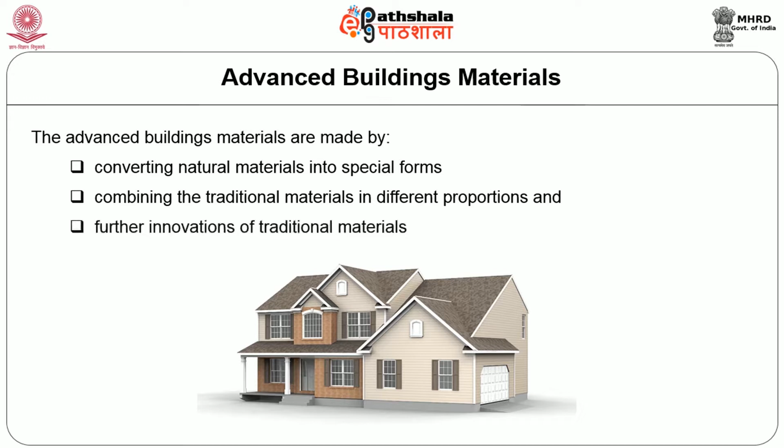First, we are going to discuss wood-based materials. In addition to wood, bamboo and plywood, many wood-based materials are nowadays manufactured in a factory to meet the current needs of the building industry. They are fiber boards, which are rigid boards available in standard sizes and thickness. It is used for wall paneling, suspended ceiling and partitions.

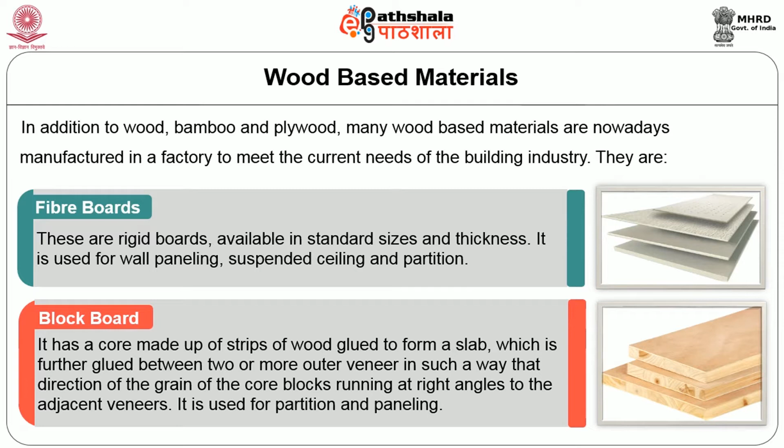The next one is block board, which has a core made up of strips of wood glued to form a slab, which is further glued between two or more outer veneers in such a way that the direction of the grain of the core blocks runs at right angles to adjacent veneers. It is used for partitions and panelings.

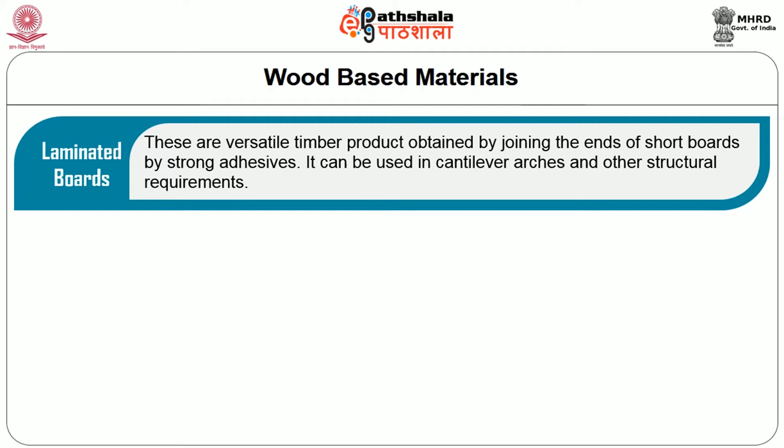The next wood-based material is laminated board, a versatile timber product obtained by joining the ends of short boards using strong adhesives. It can be used in cantilever arches and other structural requirements. Cross-laminated timber is another material, and it is the most advanced one. Compared with steel and concrete, it is cheaper, easier to assemble and more fire resistant.

Straw bale is used to create walls of a home inside of a framed structure, replacing other building materials such as concrete, wood, gypsum, plaster, fiberglass or stone. Straw bales naturally provide a very high level of insulation for hot or cold climates.

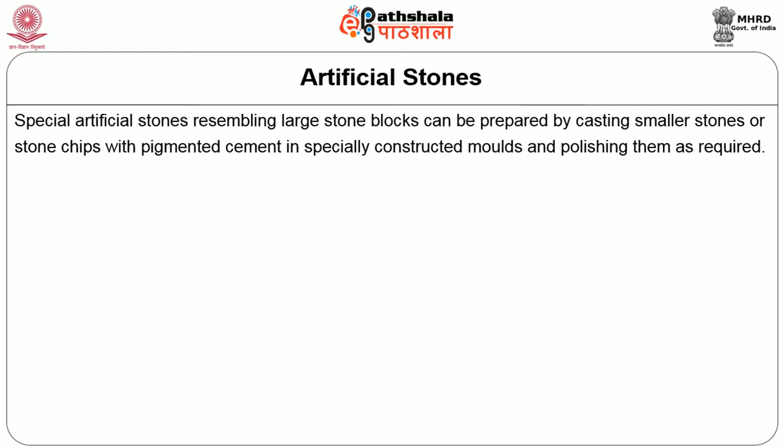The next important materials are artificial stones. Special artificial stones resembling large stone blocks can be prepared by casting smaller stones or stone chips with pigmented cement in specially constructed molds and polishing them as required. The advantages of these artificial stones are that they can be cast in different shapes and sizes as per architectural requirements.

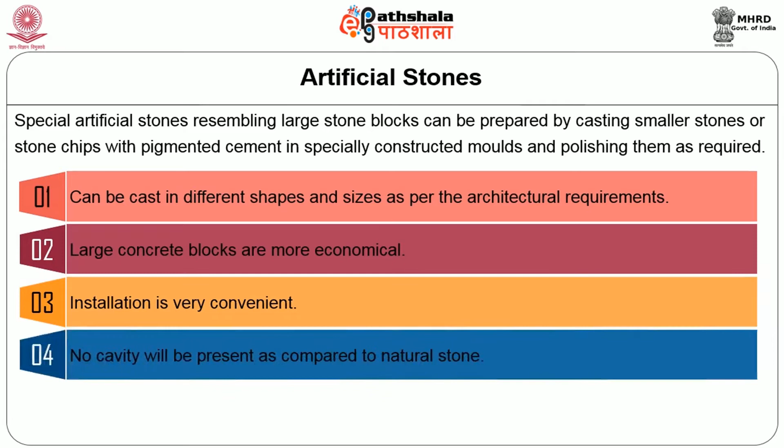These are large concrete blocks which are more economical. The installation is very convenient, and there is no cavity in it when compared to natural stone. Grooves can be kept in artificial stone while it is being cast, and these grooves can be useful for fixing various fittings.

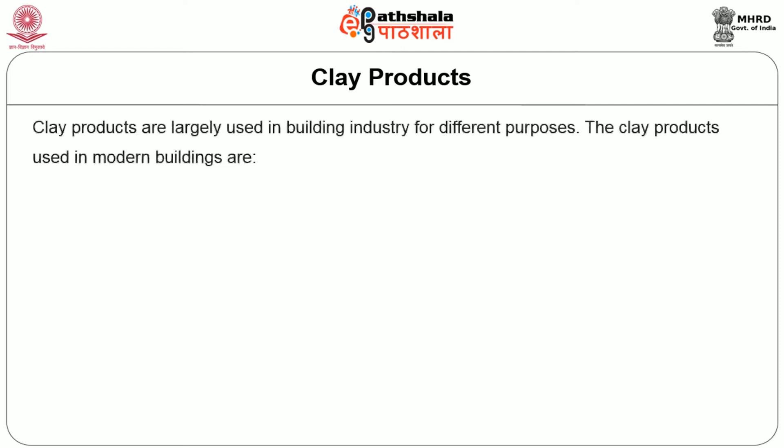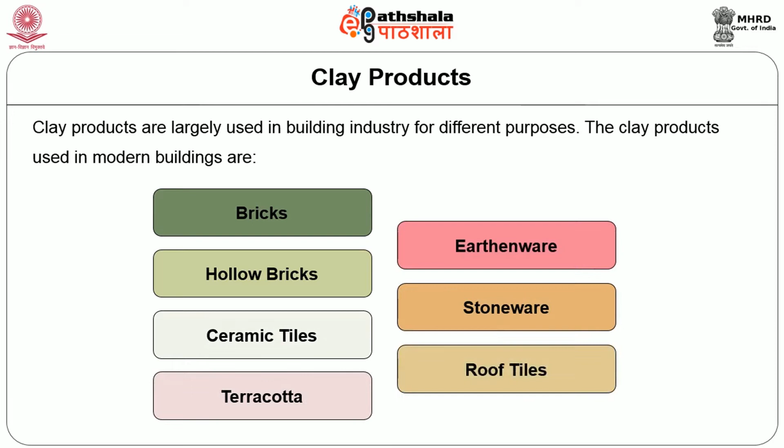The next important products are clay products. These are largely used in the building industry for different purposes. The clay products used in modern buildings are bricks, hollow bricks, ceramic tiles, terracotta, earthenware, stoneware, and roof tiles. Ceramic tiles are divided into two classes. The common tiles are used for roofing, flooring, paving, drains, walls, etc. The other one is encaustic tile, which is used for decorative purposes in floors and walls.

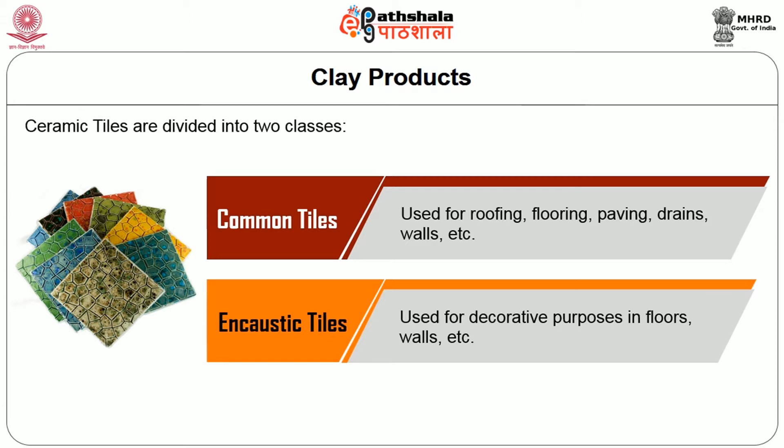The next important material is refractories, or special bricks. The term refractories denotes all materials used for construction for heat resistant purposes. The properties of refractories are: they possess excellent heat resistance, they have excellent dimensional stability, they are able to withstand abrasion, they have a high melting point, and they are chemically inert at very high temperatures.

Fire bricks or refractory bricks are made from fire clay, and the process is same as that of ordinary bricks. A refractory brick can resist high temperature without softening or melting. Due to the heat resistant property, it is used for linings of interior surfaces of furnaces, chimneys, ovens and fireplaces.

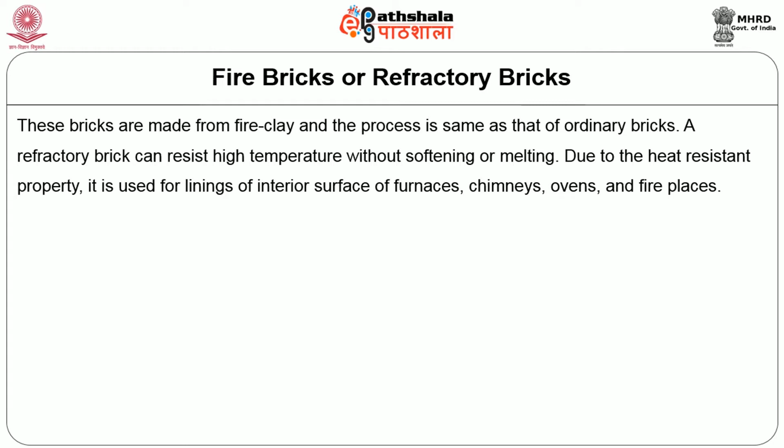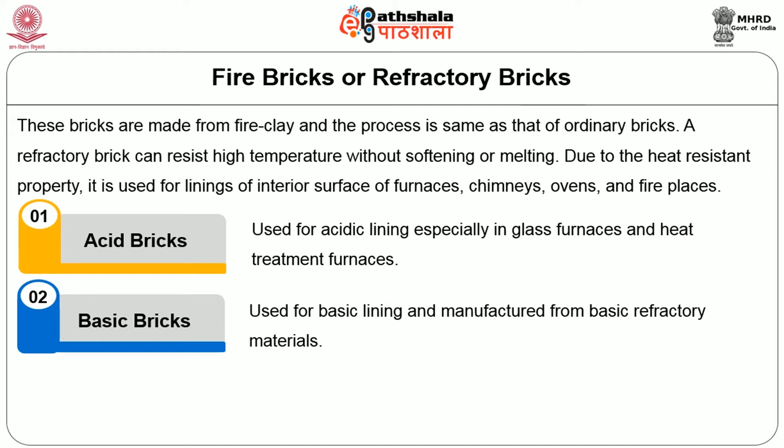There are three different types of fire bricks available. The first one are acid bricks, which are used for acidic lining, especially in glass furnaces and heat treatment furnaces. The other one is basic brick, used for basic lining and manufactured from basic refractory materials. The third one is the neutral bricks, which are used for neutral lining. They resist the corrosive action of slags and acid fumes.

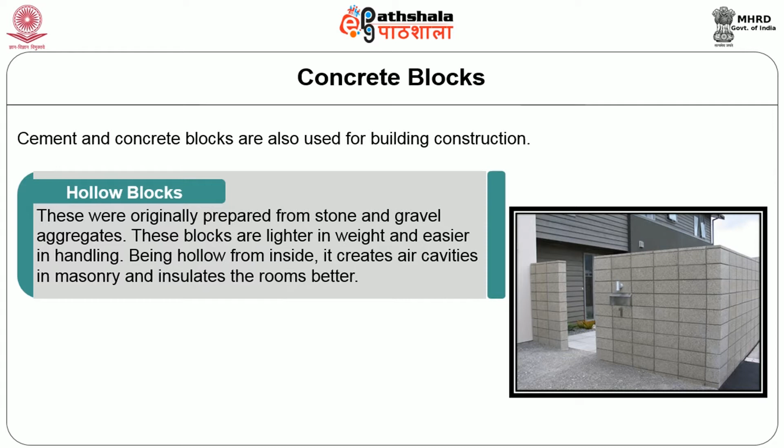The next important materials are concrete blocks. Cement and concrete blocks are also used for building construction. Hollow blocks were originally prepared from stone and gravel aggregates. These blocks are lighter in weight and easier in handling. Being hollow from inside, it creates air cavities in masonry and insulates the room better. Lightweight concrete block is manufactured by using lightweight aggregates and has good sound and thermal insulation properties.

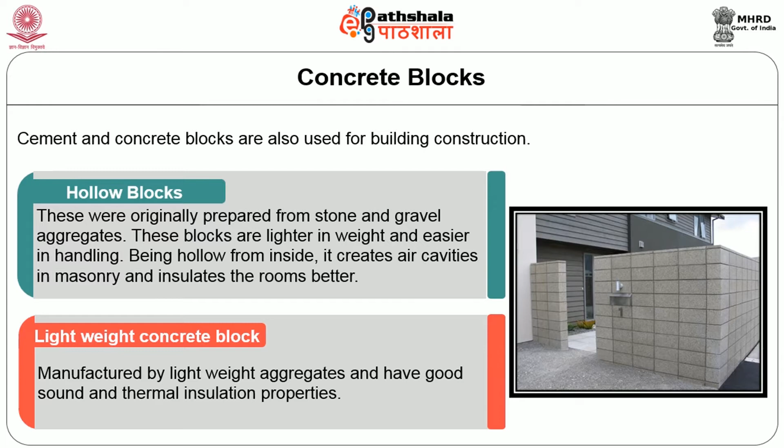Fly ash bricks is another important material which are manufactured by mixing fly ash, sand and lime in desired proportion. The manufacture of fly ash bricks will reduce environmental waste through the consumption of fly ash. It saves fuel and electricity consumption and can meet the requirement of the construction industry.

Fly ash, lime, gypsum bricks are building materials mixed with lime and gypsum. This has better bonding with mortar and brick and also provides good resistance to weathering.

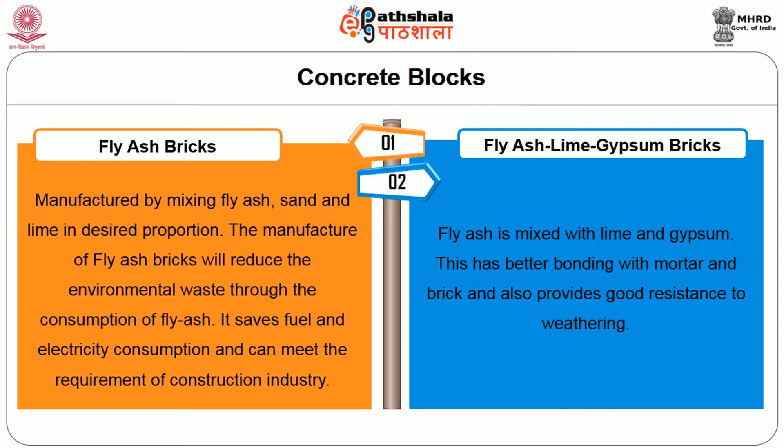Next we will see about cement and allied products. Cement is the building material obtained by burning and crushing of clay stones containing calcium carbonate and magnesium carbonate. Cement is used for various purposes and in various places like underwater, land, coastal areas, etc. Hence, it is necessary to use a particular type of cement for a special purpose.

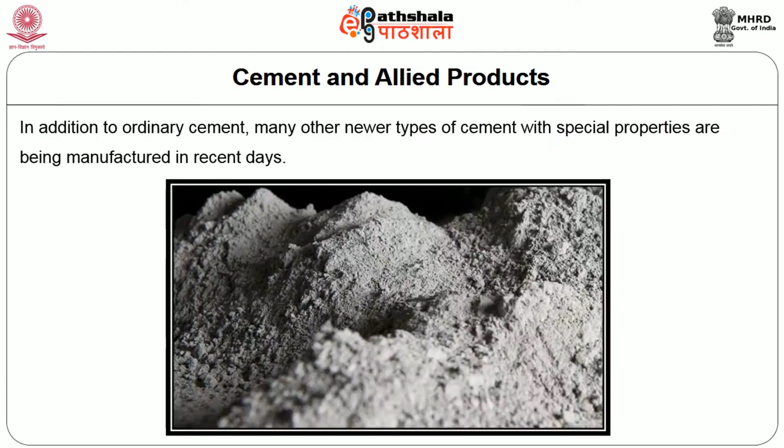In addition to ordinary cement, many other newer types of cement with special properties are being manufactured in recent days. We are going to discuss about them. First, the acid resistant cement, which increases the resistance of cement to acid and water.

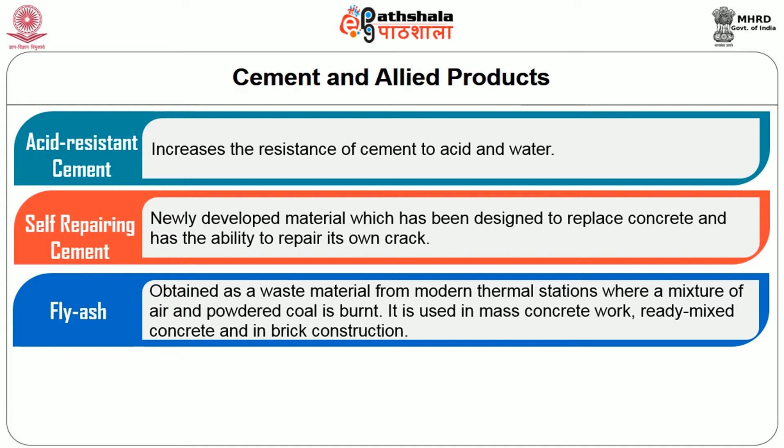Self-repairing cement is a newly developed material which has been designed to replace concrete and has the ability to repair its own crack. Fly ash is obtained as a waste material from modern thermal stations where a mixture of air and powdered coal is burnt. It is used in mass concrete work, ready-mixed concrete and in brick construction.

Liquid granite is made of recycled materials which completely replaces cement in concrete. The material is light in weight and has the same load bearing capacity of cement. Liquid granite is fire resistant and can withstand high temperatures of up to 1100 degrees Celsius for longer periods.

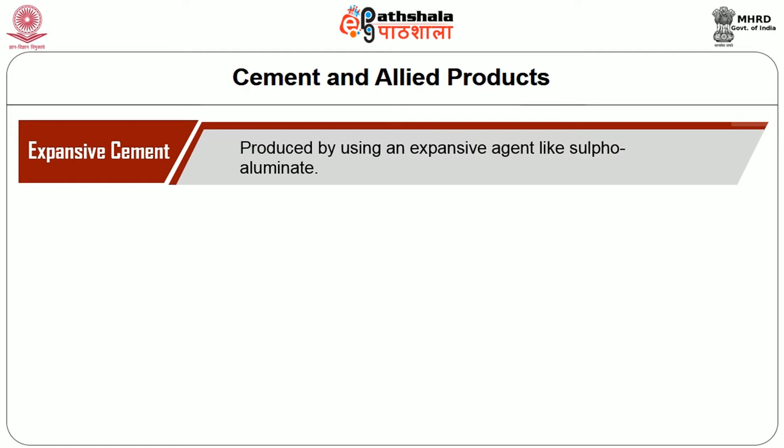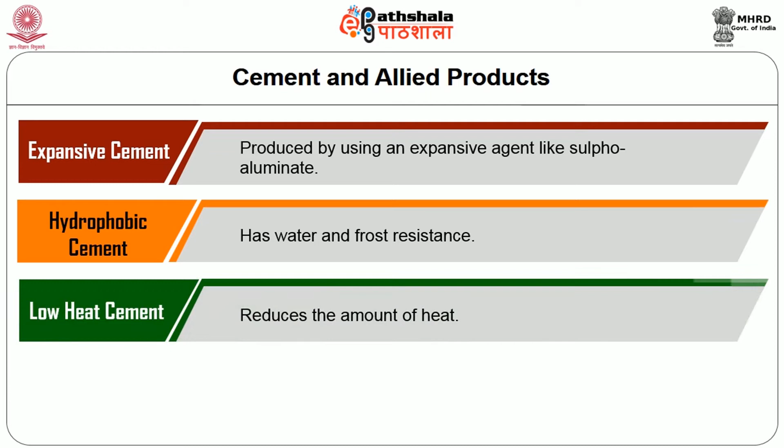Expansive cement is another type which is produced by using an expansive agent like sulpho-aluminate. Hydrophobic cement is a newer material which has water and frost resistant property. Low heat cement reduces the amount of heat. Next type is air entraining cement, which is specially suited to improve workability with smaller water cement ratio and to improve frost resistance of concrete.

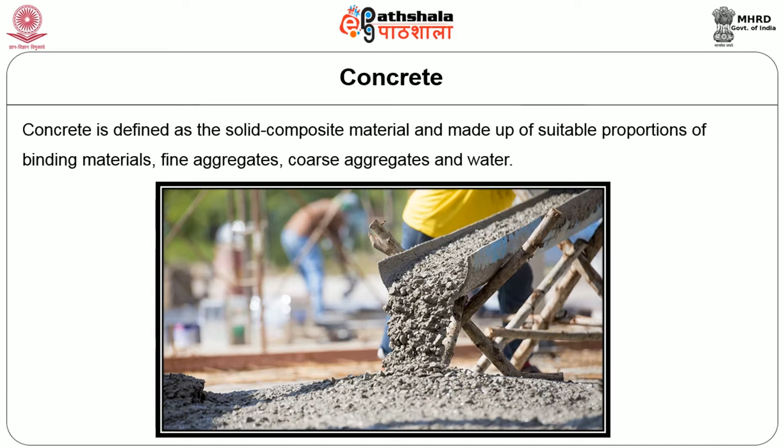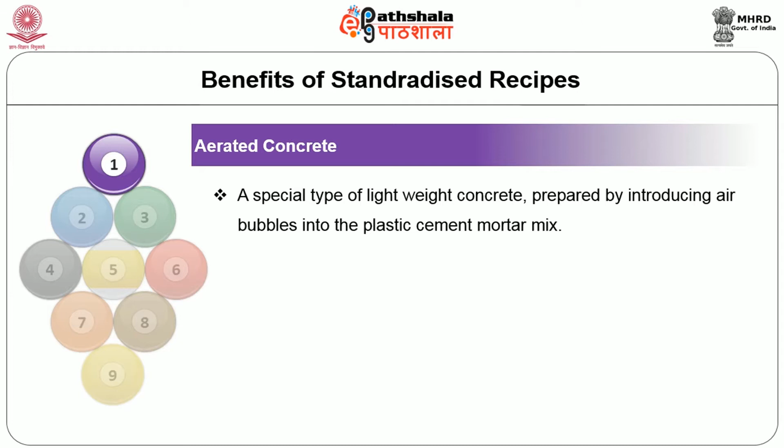Next, we are going to elaborate on concrete. Concrete is defined as the solid composite material made up of suitable proportions of binding materials, fine aggregates, coarse aggregates and water. The special types of concrete which have been recently developed are aerated concrete, which is a special type of lightweight concrete prepared by introducing air bubbles into the plastic cement mortar mix.

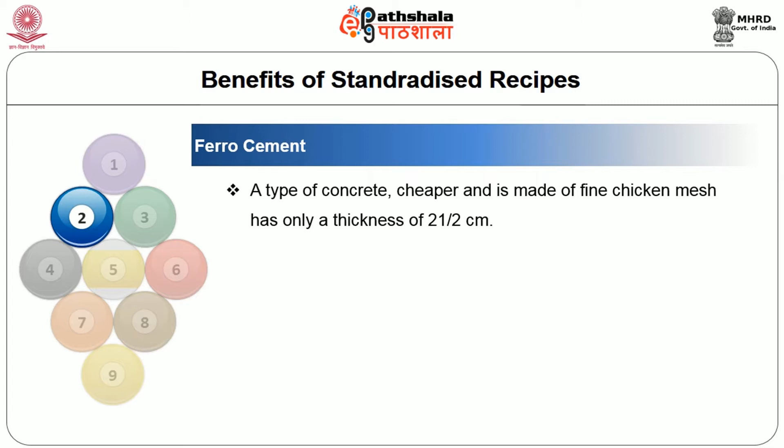Ferro cement is a type of concrete which is cheaper and is made of fine chicken mesh, has only a thickness of 2.5 cm. Translucent concrete is a concrete based building material mixed with glass fiber optical strands which create a solid but sheer block. It can be used in flooring and pavements. The light transmitting property gives a fresh, open and spatial look to the interiors.

Next advanced concrete is insulated concrete panels, which are the most durable, strong and energy efficient new home building materials available in the market. These panels are constructed with 4 to 6 inches of polystyrene or polyurethane insulation and concrete on both sides.

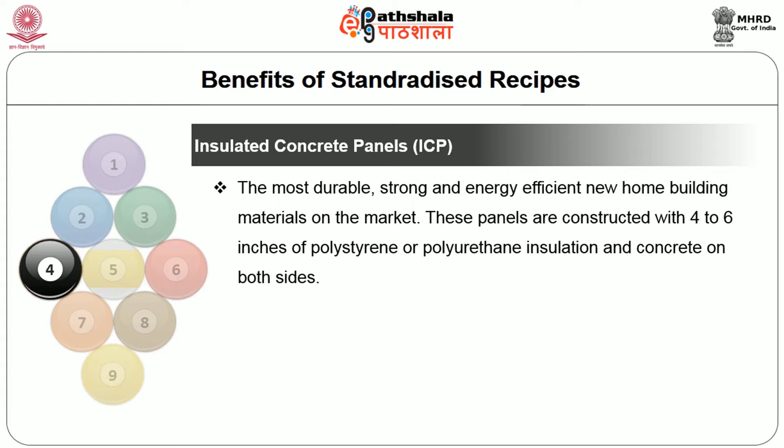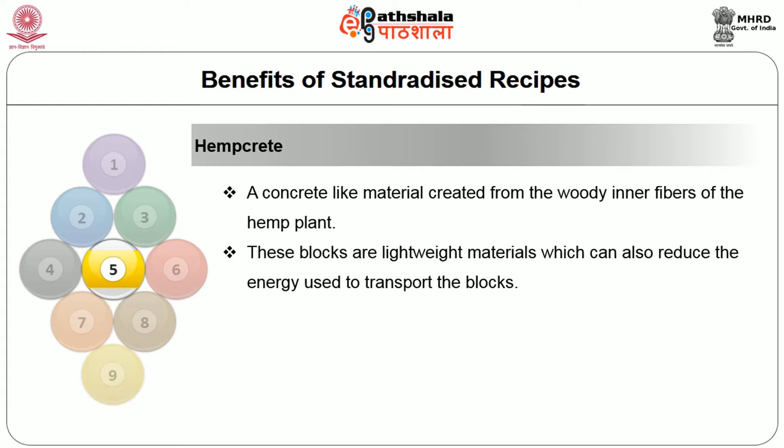Hempcrete is a concrete-like material created from the woody inner fibers of the hemp plant. These blocks are lightweight materials which can also reduce the energy used to transport the blocks.

Richlite is another new material which is a dense material made from paper and phenolic resin. The main constituent of the material is recycled paper. It has very high strength and is highly resistant to temperature up to 350 degrees Fahrenheit.

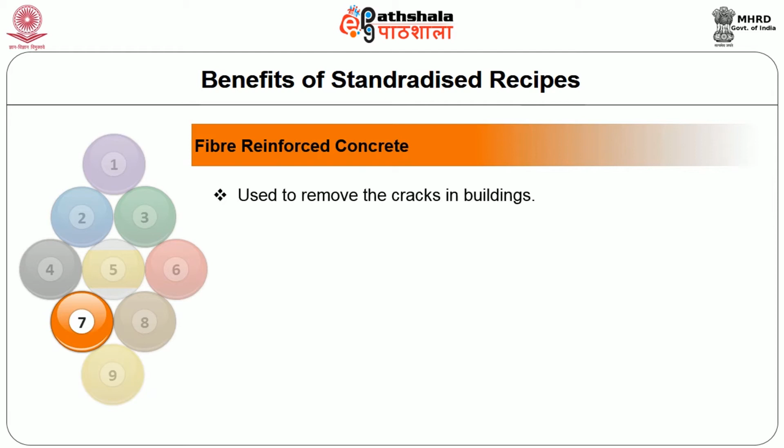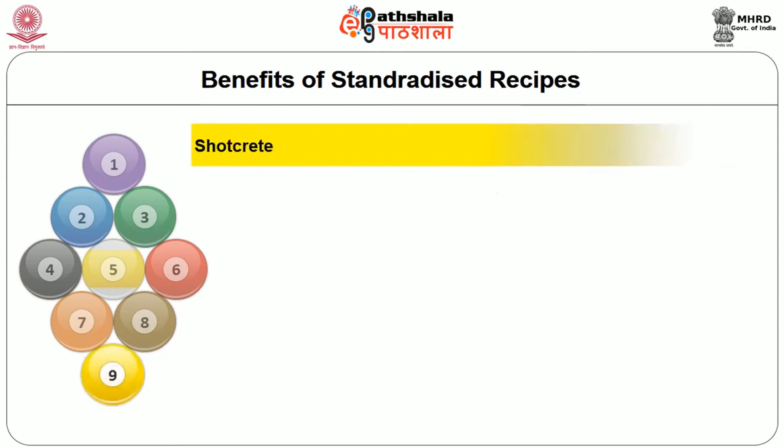Fiber reinforced concrete is used to remove cracks in buildings. Polymer concrete has high corrosion resistance, low permeability and high resistance to vibration. Shotcrete is an advanced technique in which concrete is applied over a surface pneumatically at high velocity. Other advanced concrete types are prepacked concrete, vacuum concrete and pumped concrete.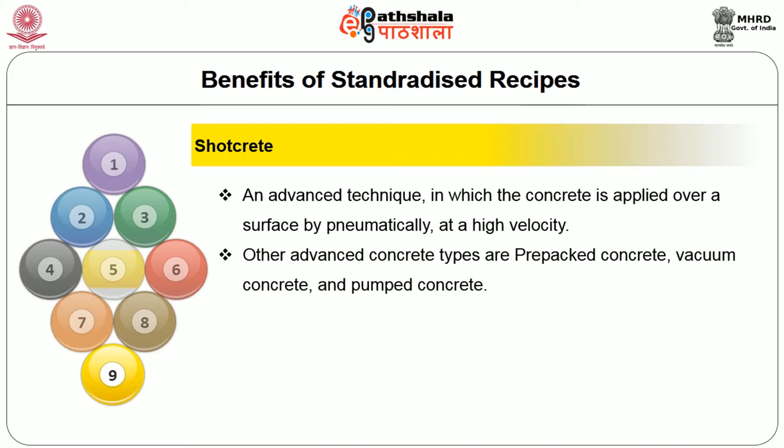Next, we are going to discuss the special metals used in the construction industry. First, we will see about steel. Steel is a ferrous material which is harder and tougher than iron. Nowadays, steel is subjected to various heat treatments to change its property, to increase surface hardness, to increase resistance to heat and corrosion, to make the steel easily workable, to increase strength and hardness, and to refine the grain. The next important metal used in construction is aluminium, which has many unique properties that make it an essential building material.

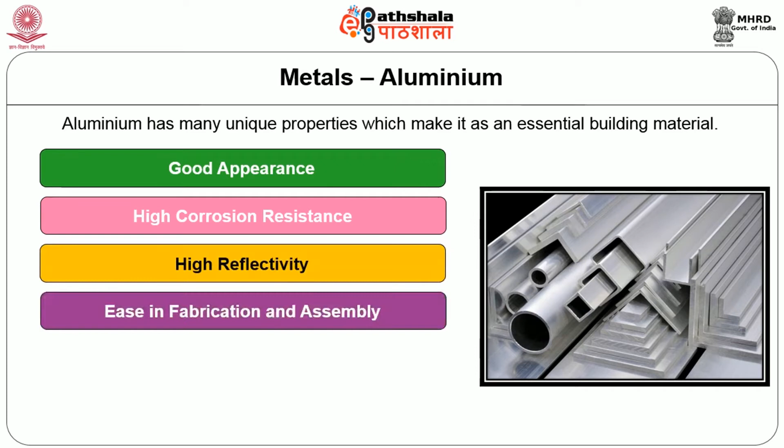These properties are good appearance, high corrosion resistance, high reflectivity, ease in fabrication and assembly, noise control and air tightness. Transparent aluminium is a crystalline material with excellent optical transparency. It is hard, highly strong and durable, and is used in the construction of windows, domes, plates, rods and tubes in a wide range of sizes and thicknesses.

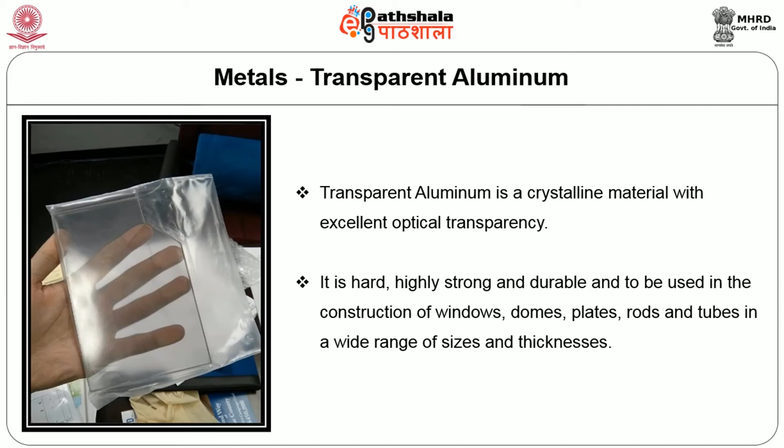The next very important and versatile material is glass. Numerous varieties of glass have been developed in recent times for various purposes such as walls and ceilings of hollow glass plaques, windows, furniture, bathroom fittings, glazing, etc. It is possible to change the chemical, electrical, mechanical and optical properties of glass by suitably changing its basic composition. Flat glass comes in many highly specialized forms intended for different applications, which are discussed now.

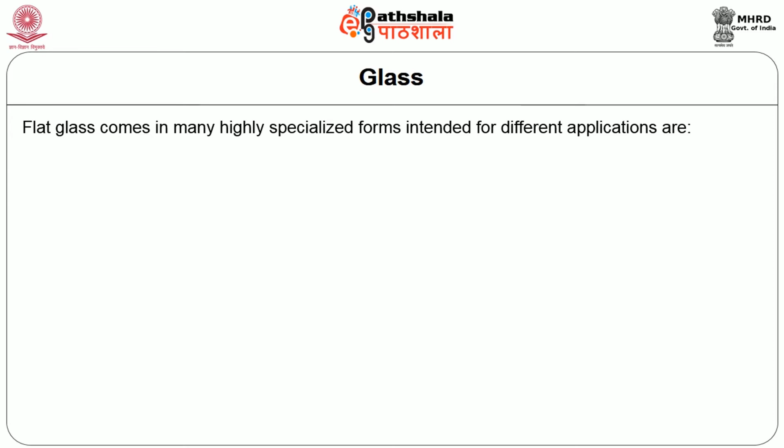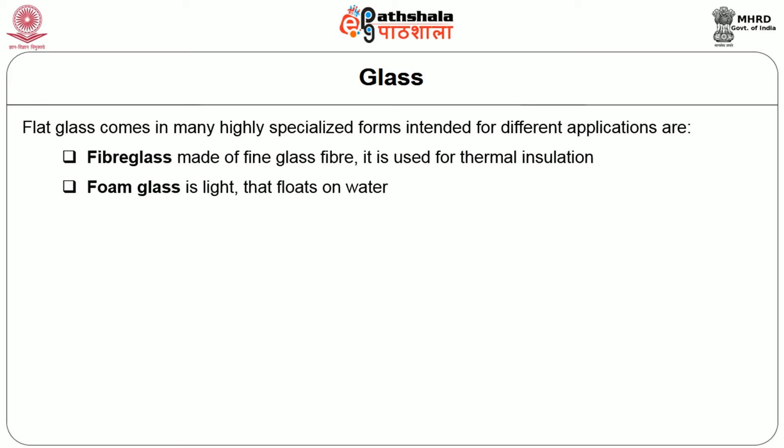Fiberglass, which is made of fine glass fiber, is used for thermal insulation. Foam glass is light and floats on water. Another type is ultraviolet ray glass, which transmits ultraviolet rays effectively. Invisible glass allows more light to pass through. Safety glass, if it breaks, the pieces will not shatter.

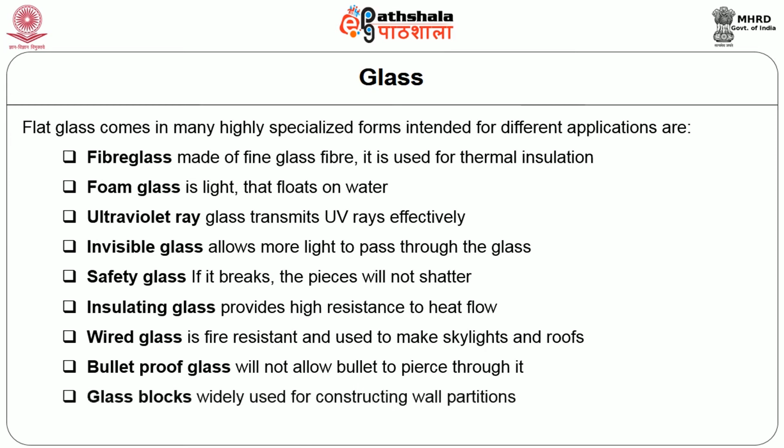Insulating glass provides high resistance to heat flow. Wired glass is fire resistant and used to make skylights and roofs. Bulletproof glass will not allow a bullet to pierce through it; it is a very strong glass. Then there are glass blocks, which are widely used for constructing wall partitions.

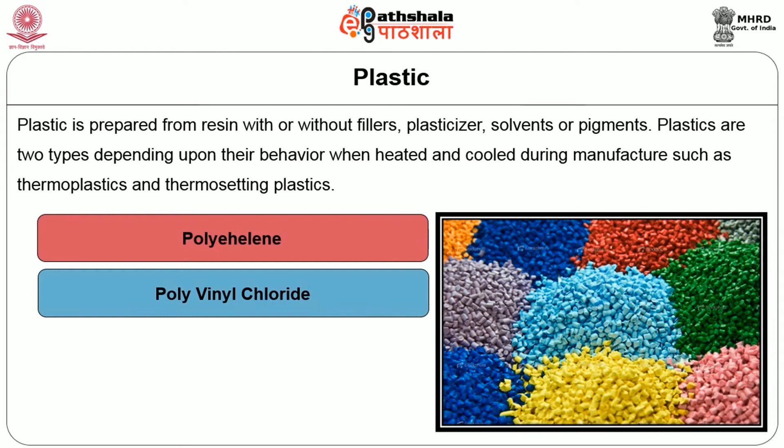The next material we are going to discuss is plastic, which is prepared from resin that may be natural or synthetic, with or without fillers, plasticizer, solvent or pigments. Plastics are of two types depending upon their behavior when heated and cooled during manufacture: thermoplastic and thermosetting plastics. Various plastic materials used recently in buildings are polyethylene, polyvinyl chloride, melamine formaldehyde and acrylic.

Gypsum is a white crystalline substance made of hydrated sulfate of calcium, also recently used as a building material. It is mainly used in the manufacture of cement to increase its setting time, in paper industries, and for preparing gypsum boards and plaster of Paris.

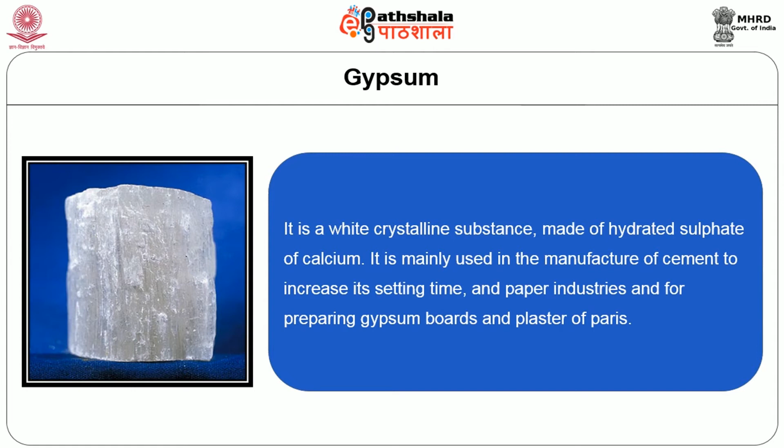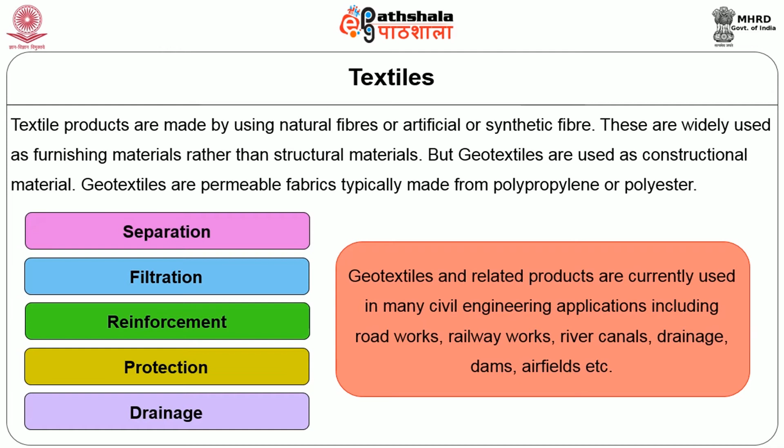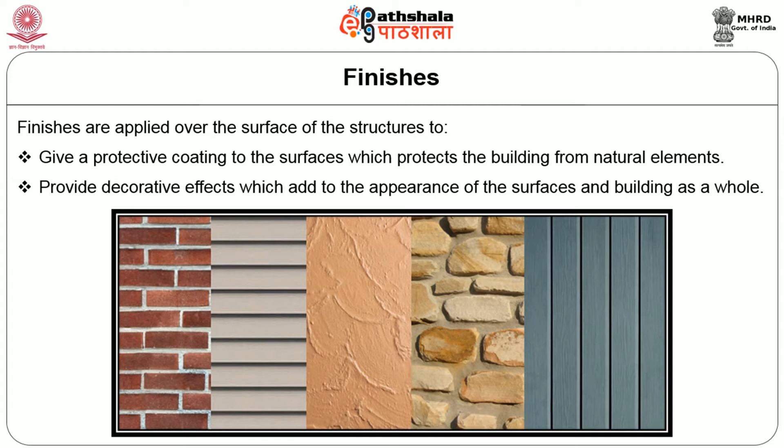Finishes are applied over the surface of structures to give a protective coating, which protects the building from natural elements such as rain, wind and sun, and which provides decorative effects that add to the appearance of the surfaces and the building as a whole.

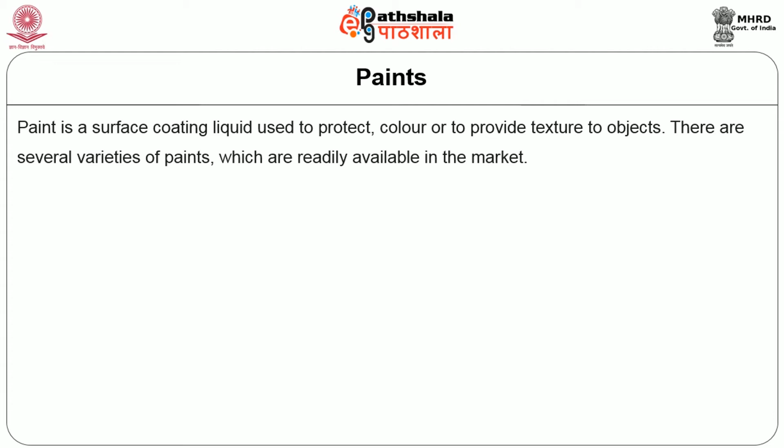Wall finish: though many wall finishes are available for current use, a few will be described here. Paint is a surface coating liquid used to protect, color or provide texture to objects. There are several varieties of paints readily available in the market. Chlorinated rubber paints are used for protecting surfaces against acid fumes.

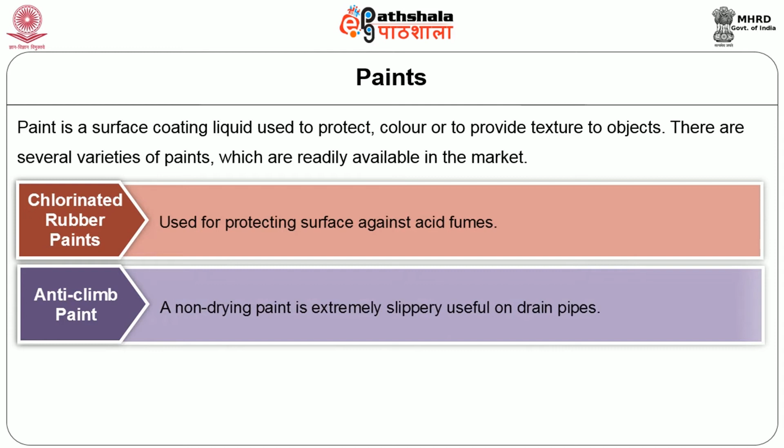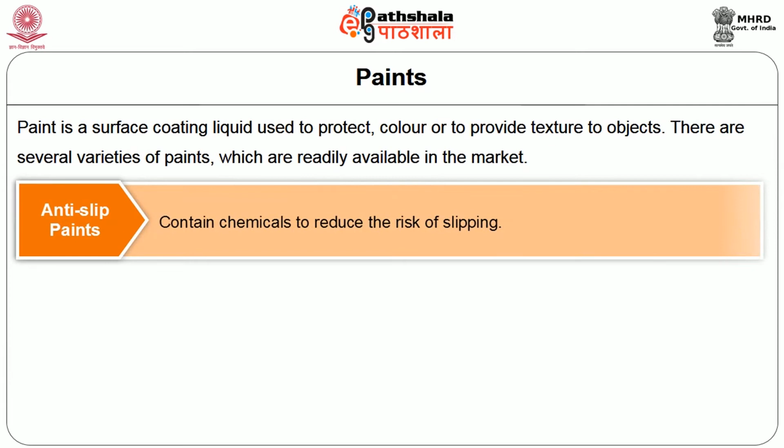Anti-climb paint is a non-drying paint used to make surfaces extremely slippery, useful on drain pipes. Anti-slip paint contains chemicals to reduce the risk of slipping. Insulating paint reduces the rate of heat transfer through the surface where it is applied.

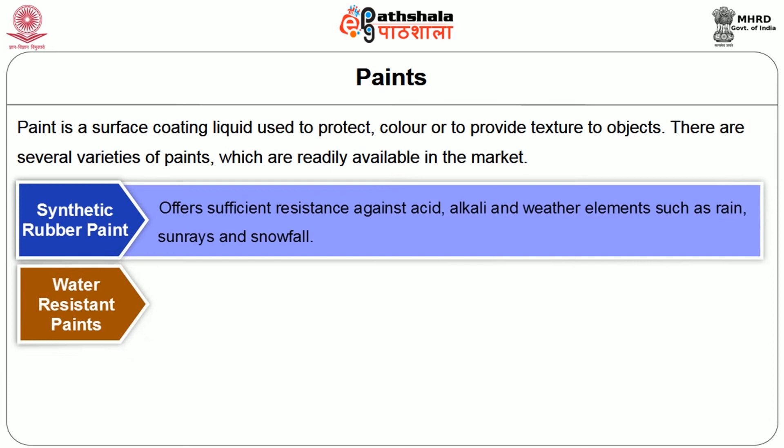Roof coating is a liquid that provides ultraviolet protection. Synthetic rubber paint or rubber-based paints offer sufficient resistance against acid, alkali, and weather elements such as rain, sun rays and snowfall. Water-resistant paints give a high glossy finish and are ideal for kitchens and bathrooms, as these areas are subject to a lot of moisture.

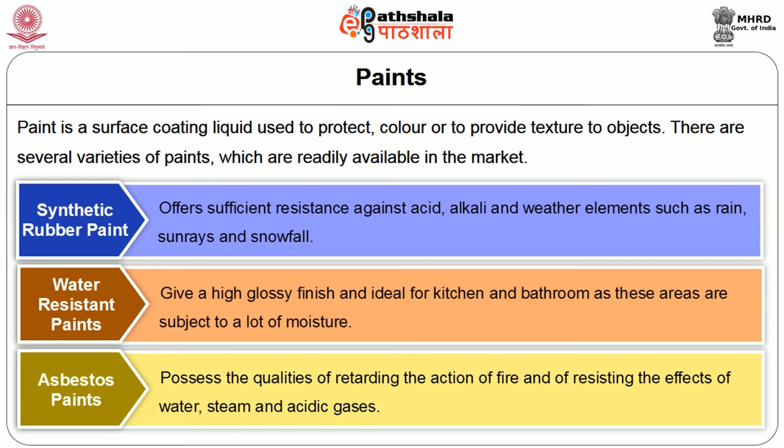The next important paint is asbestos, which possesses the qualities of retarding the action of fire and resisting the effects of water, steam and acidic gases.

When we talk about exterior paints, all paint companies in India have produced and marketed their own brand of exterior emulsion paints with special qualities such as good appearance, waterproof, antifungal, anti-algae and heatproof or reflective properties.

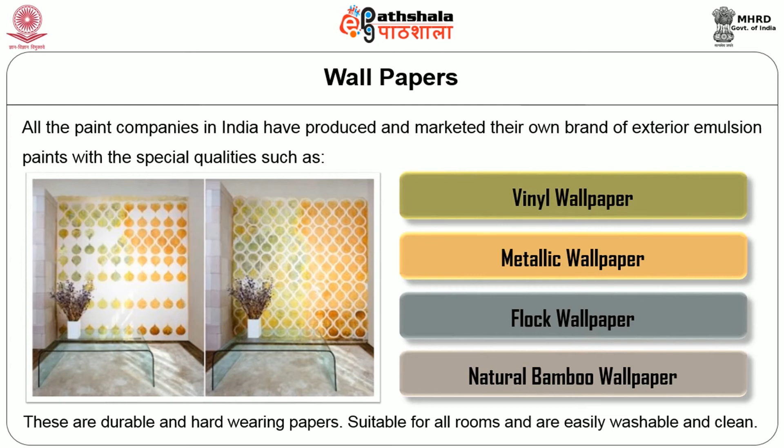Next we will pass on to wallpapers. There are many types of wallpapers available in the market today, such as vinyl wallpaper, metallic wallpaper, flock wallpaper and natural bamboo wallpaper. These wallpapers are durable and hard wearing, suitable for all rooms, and are easily washable and clean.

Next we will discuss wall panels as used as a finish. These are made of thin sheets of material installed over walls to add aesthetic and functional characteristics of a wall. Many panels made with wood, plywood, laminates, stainless steel and plastics are available in the market today.

Wall panels are made of thin sheets of material installed over walls to add aesthetic and functional characteristics. Many panels made with wood, plywood, laminates, stainless steel and plastics are available in the market.

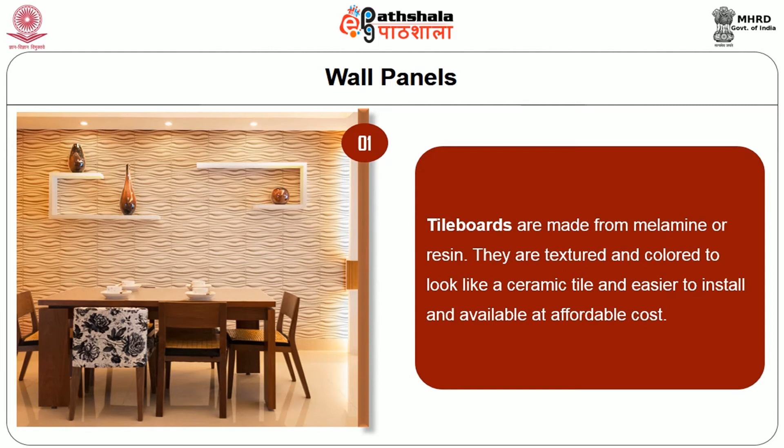The newer varieties are tile boards, which are made from melamine or resin. They are textured and colored to look like ceramic tile, easier to install and available at affordable cost.

The next important panels are acoustical panels, which are used to control noise levels in a space. They are made from foam or wood, which helps panels absorb sound, and are commonly used in schools, auditoriums and hotels.

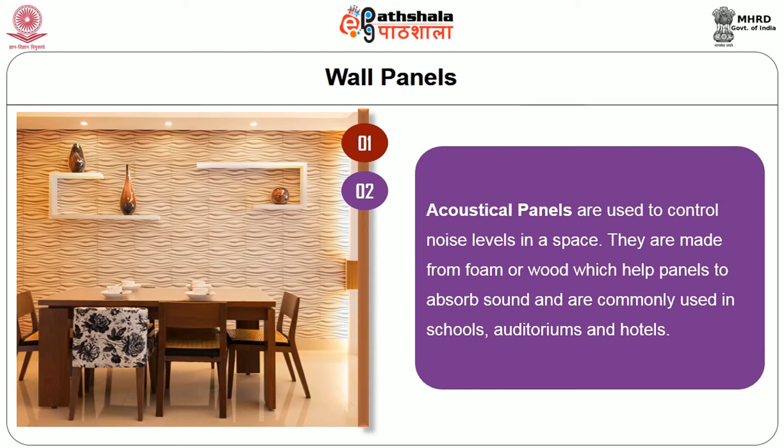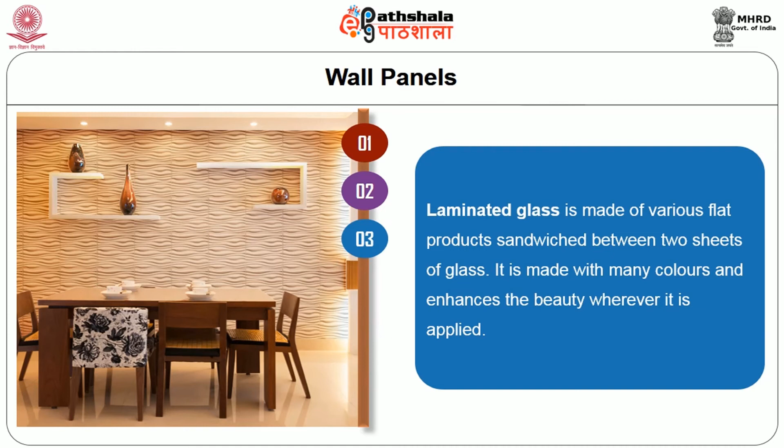Laminated glass is another type of wall finish, made of various flat products sandwiched between two sheets of glass. It is made with many colors and enhances the beauty wherever it is applied.

Etched glass is another material, obtained by treating the glass with hydrofluoric acid to produce a surface finish that has a frosted appearance. The etching on glass is used to diffuse light, reduce glare and obtain a translucent appearance.

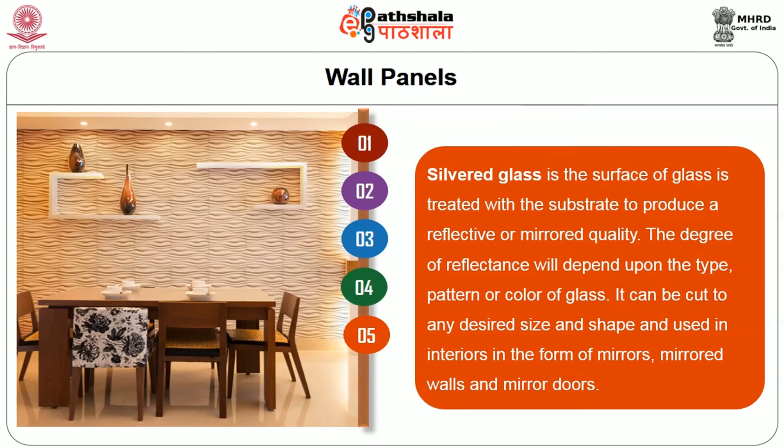Silvered glass: the surface of glass is treated with a substrate to produce a reflective or mirrored quality. The degree of reflectance depends upon the type, pattern or color of glass. It can be cut to any desired size and shape and used in interiors in the form of mirrors, mirrored walls and mirrored doors.

Plaster of Paris is another material which gives a smooth finish. It is generally applied on internal walls for ornamental works and produces a hard and strong surface.

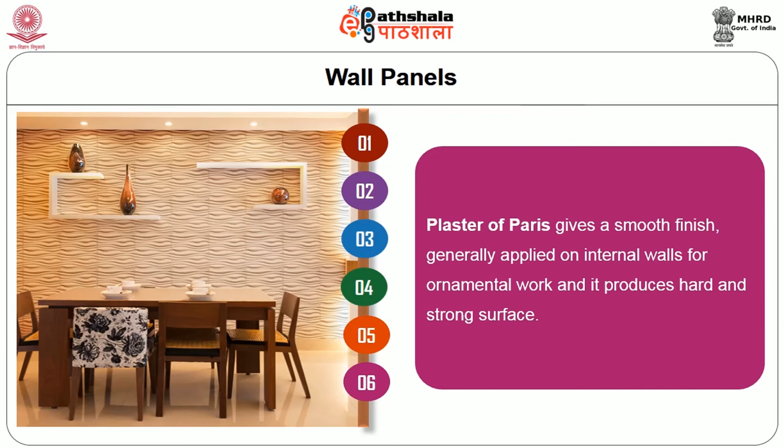We will pass on to the topic of floor finish. Floors are the horizontal elements of the building structure and provide support for the occupants. Various types of materials and finishes are employed for flooring. Floor finishes can be classified as hard floor finishes, resilient floor finishes and soft floor coverings.

Hard floor finishes: mud, stone, brick, timber, concrete, terracotta, terrazzo and ceramic tile were the floor surfaces which have been used for several years. However, there are several new materials which have come recently and are being laid on floors to improve their appearance and functionality.

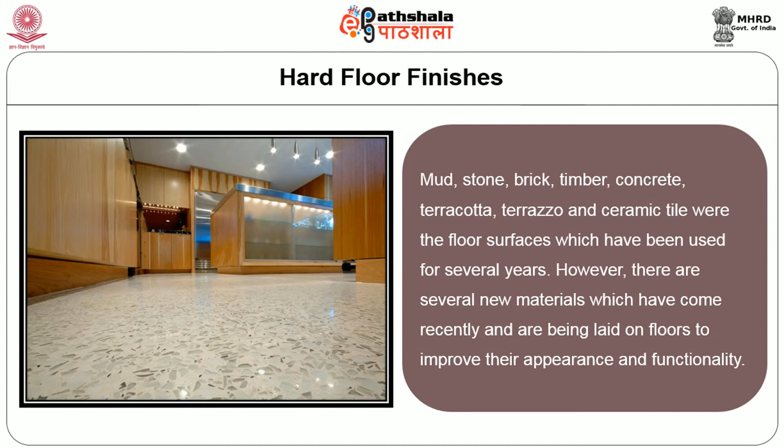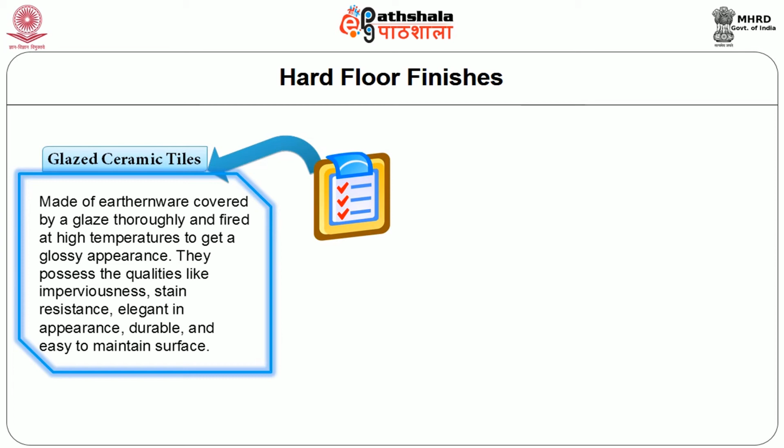One such important material is glazed ceramic tile, made of earthenware covered by a glaze and fired at very high temperature to get a glossy appearance. They possess qualities like imperviousness to water, stain resistance, elegant appearance, durability and an easy-to-maintain surface.

Terrazzo is another special type of flooring in which marble chips are embedded in a matrix of cement concrete. This terrazzo flooring is becoming very popular these days for providing floor finishes in banks, shopping malls, hotels, etc.

Glass flooring can also be used as a special floor finish where it is desired to transmit light from an upper floor to another lower floor, such as from a ground floor to a basement.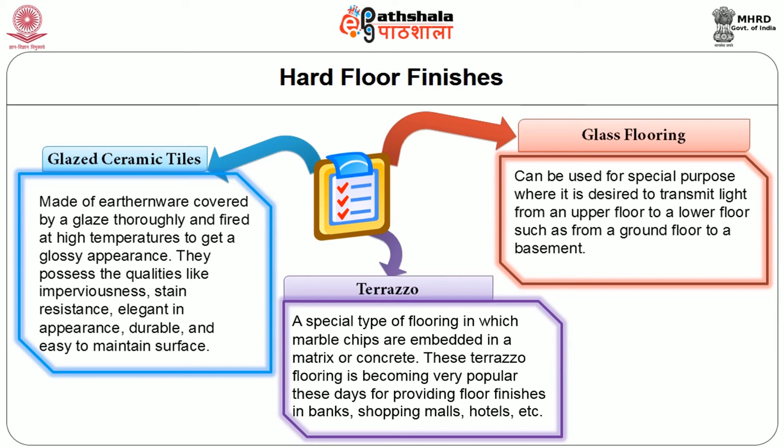We will pass on to resilient floor finishes. These finishes are soft and resilient, which means they readily recover their original shape after compression.

Resilient floors which are popular in recent days include vinyl, a synthetic mixture made from vinyl resins, colored pigments and plasticizers. It is available in sheets and tiles, both plain and patterned, with self-sticking backs that make it easy to lay. Its advantages are: it resists abrasion and dirt, is attractive, easily maintained and fire retardant.

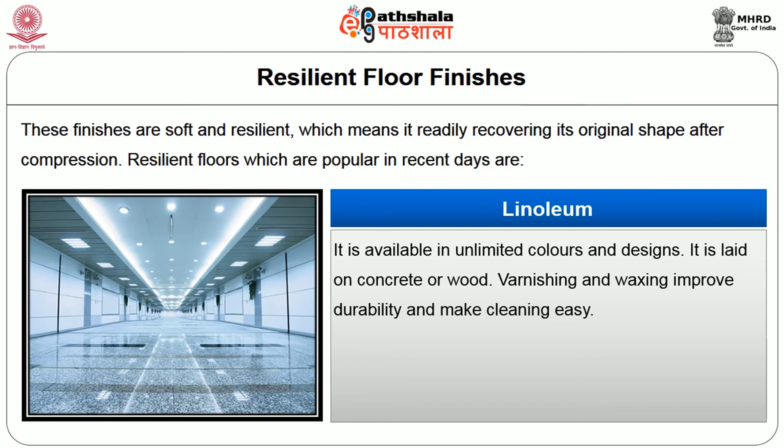Linoleum is another resilient floor finish which is available in unlimited colors and designs. It is laid on concrete or wood floors. Varnishing and waxing improve the durability of linoleum floors and make them easy to clean.

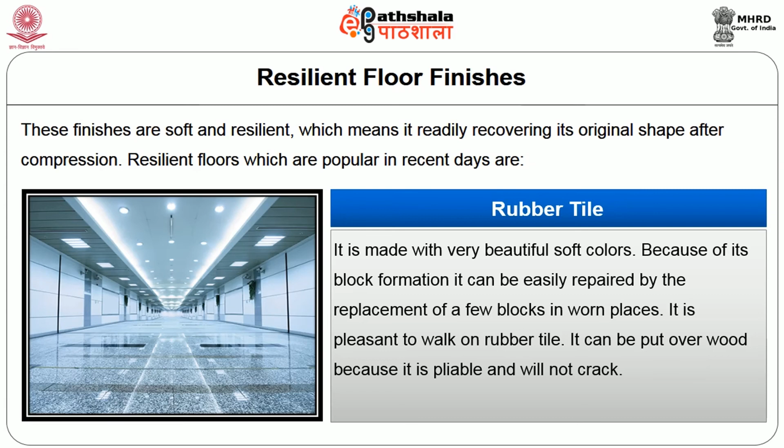Rubber tile is made with very beautiful soft colors. Because of its block formation, it can be easily repaired by the replacement of a few blocks in worn places. It is pleasant to walk on and can be put over wood because it is pliable and will not crack.

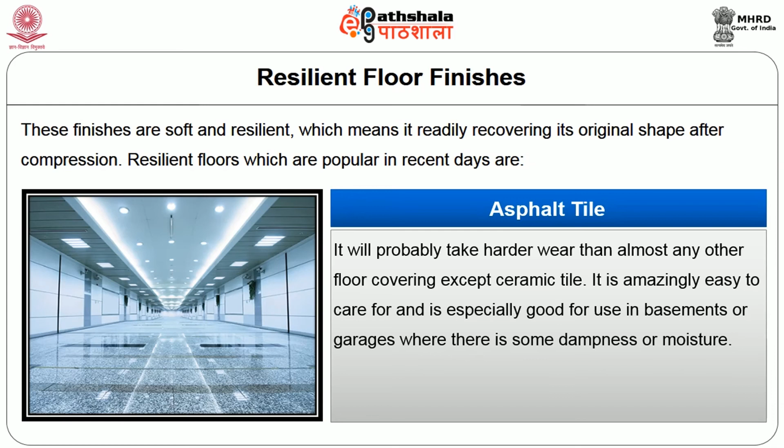Advanced flooring is plastic or PVC flooring, a recent development in floor construction, successfully used as a covering over the concrete floor base in all types of buildings. Asphalt tile will probably take harder wear than almost any other floor covering except ceramic tile. It is amazingly easy to care for and especially good for use in basements or garages where there is some dampness or moisture.

Next, we will pass on to soft floor coverings. The use of soft floor coverings such as rugs and carpets, mostly woven using natural or synthetic fibers, has increased in the past few years.

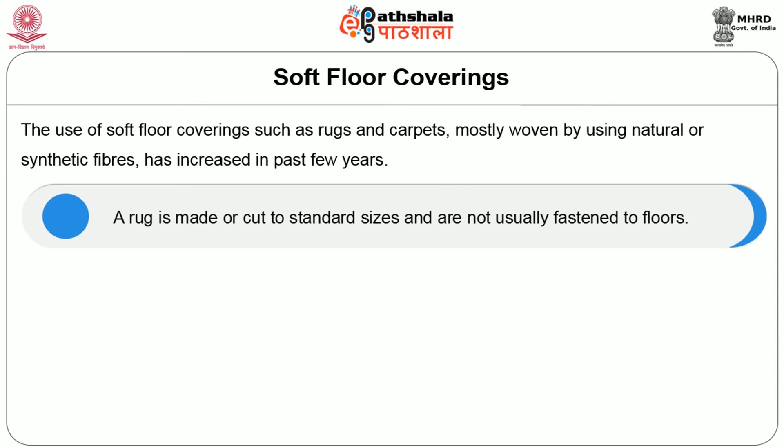A rug is made or cut to standard sizes and is not usually fastened to floors. Carpet is a type of rug cut and pieced to cover the entire floor and is generally fastened to the floor.

The style and performance of carpet have seen many advances in recent years. With the use of technology and development of new fibers, today's carpet manufacturers are able to combine texture, color and pattern to create beautiful carpets.

Polyester and nylon carpets are the first choice of consumers today because of their durability, high resiliency, soil and stain resistance, softness, resistance to fading, and resistance to mildew and moths. These carpets are a good choice for high traffic areas or rooms where children or pets play.

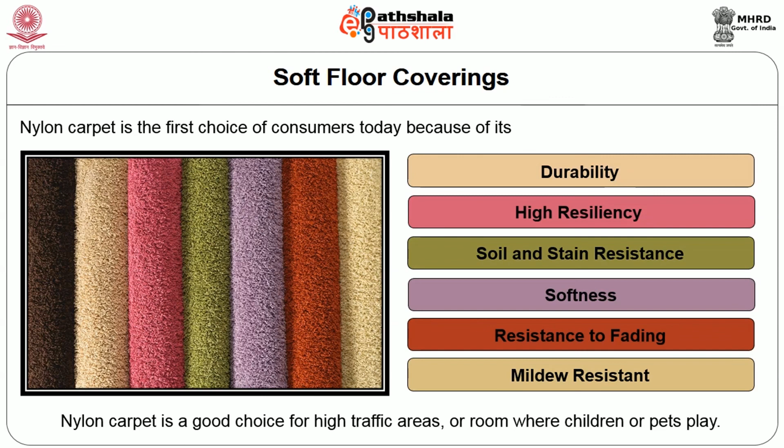Next, we will pass on to the topic of ceiling finishes. Plaster finish has evolved over the centuries. Now, various techniques are employed to make this oldest form of finish more interesting.

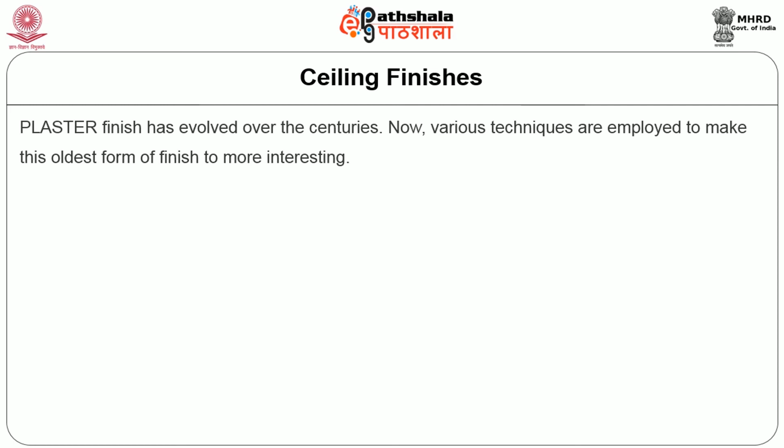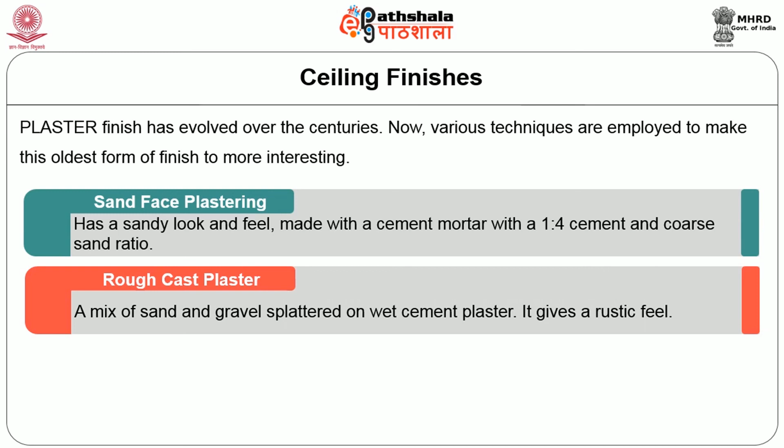Sand face plastering has a sandy look and feel, made with a cement mortar in a 1:4 cement and coarse sand ratio. Rough cast plaster is a mix of sand and gravel splattered on wet cement plaster, giving a rustic feel.

Another finish, pebble dash plaster, is the same as rough cast plaster, but 6 mm pebbles are used in the mix. Another important ceiling finish is drywall, a method of construction using gypsum board.

These panels are usually fastened directly to the ceiling joists, and the joints are made invisible by taping. There are different types of drywall materials available, such as fire resistant boards, acoustical boards, mold resistant boards, and foil backed drywall.

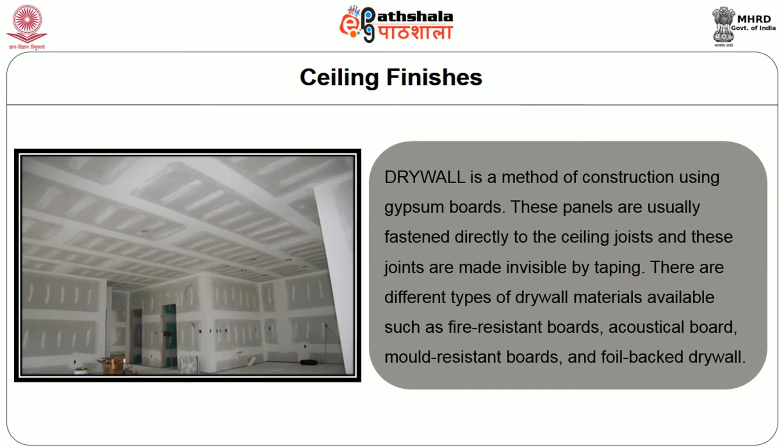False ceiling, also known as dropped ceiling or suspended ceiling, is a ceiling that hangs lower from the roof, leaving space between the actual roof and ceiling.

It improves the aesthetic appearance of the interior and helps in acoustical treatment. It hides all non-pleasing elements from view. False ceilings can be made with a variety of materials.

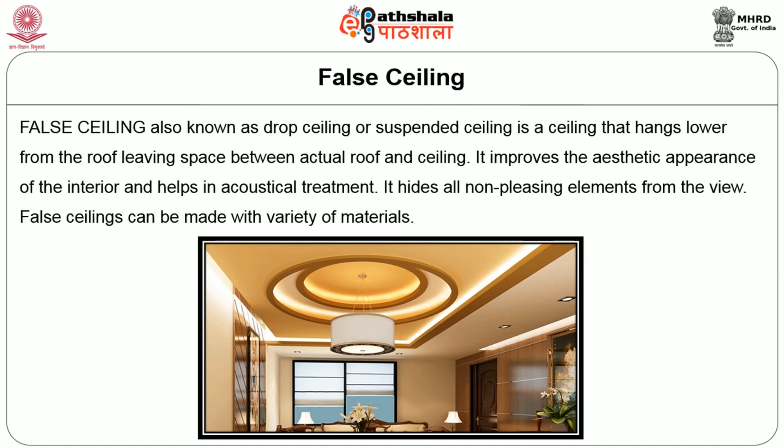Gypsum false ceiling is a soft, lightweight ceiling consisting of gypsum boards supported by iron frameworks. Metal false ceilings are highly decorative, durable, with a shiny surface, and are enjoying new popularity today.

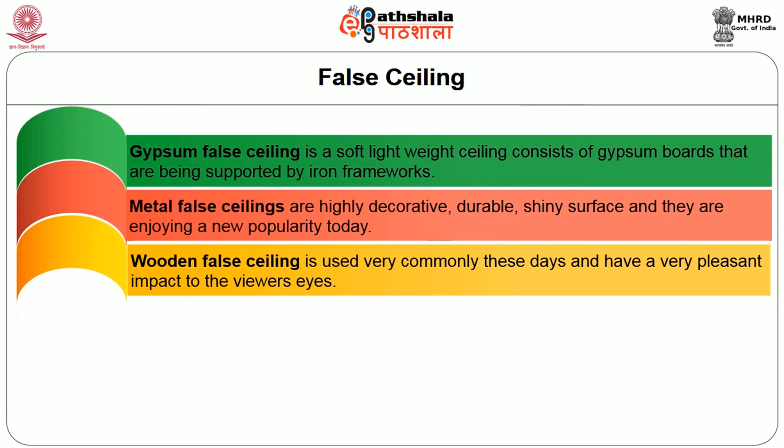Wooden false ceilings are very common these days and have a very pleasant impact on the viewer's eyes. Wooden panels or wooden boards can be used to make a wooden false ceiling.

The next one is fiber false ceiling, made from natural or synthetic minerals. They are very good heat insulators as well as soundproofing material.

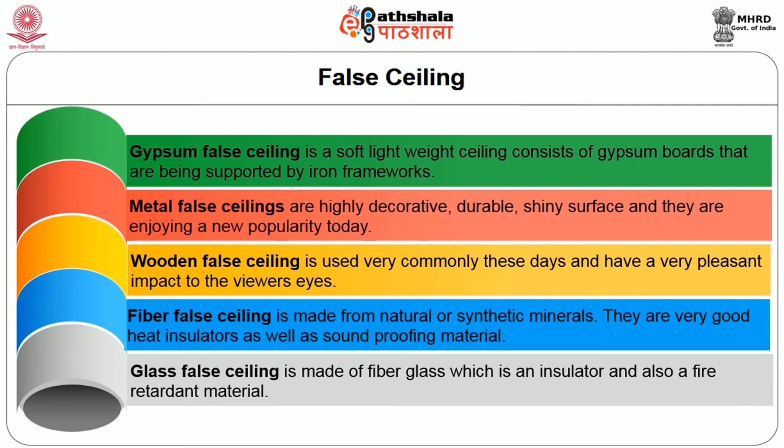Glass false ceiling is another type, made of fiberglass, which is also an insulator and a fire retardant material. Glass false ceiling looks great on the ceiling, and aesthetically they appear awesome.

In conclusion, as we have discussed in this lesson, many new building materials and finishes are being developed and introduced in the market today. Most of the newer materials possess qualities such as being attractive, recyclable, energy efficient, cost effective, or helping make our environment pollution free. In the current scenario, it is essential to replace traditional building materials with new emerging building materials and finishes.

So, more advanced, innovative building materials and finishes should be developed and utilized to construct buildings that are more strong, yet simple and attractive.